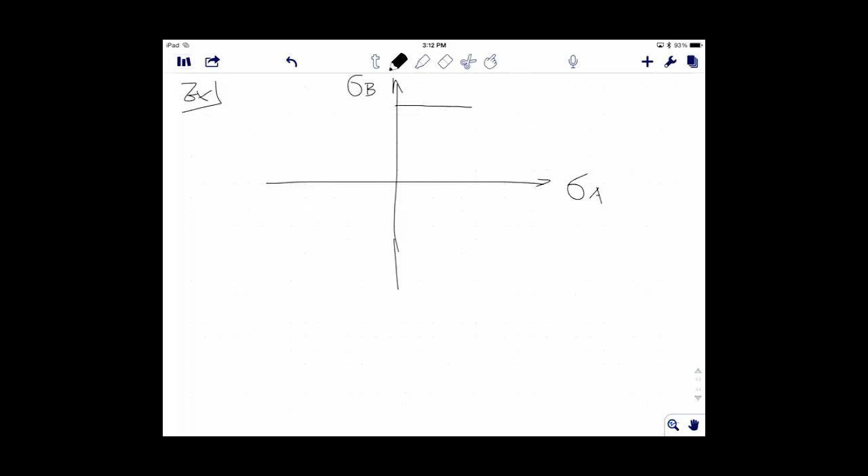Examples, finally. First of all, let me do a quick review of what we learned in the past week. Everything we learned can be summarized in this plot. You have two-dimensional loadings, then you have two different failure criteria to assess the failure of the material of the system: maximum shear stress and distortion energy.

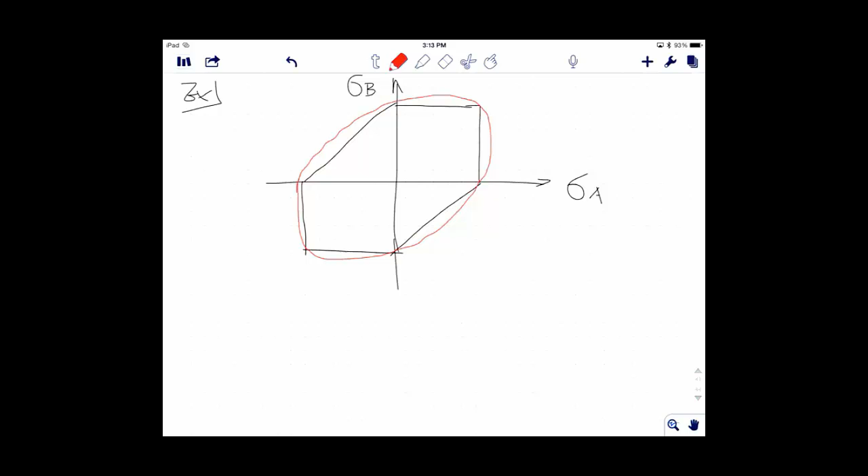Okay, so the red is distortion energy, and the maximum shear stress is the stuff inside, black. Now, the key point here is maximum shear stress is a little conservative, and distortion energy is a little aggressive compared to maximum shear stress. So we'll see how we can quantify that aggressiveness and conservativeness.

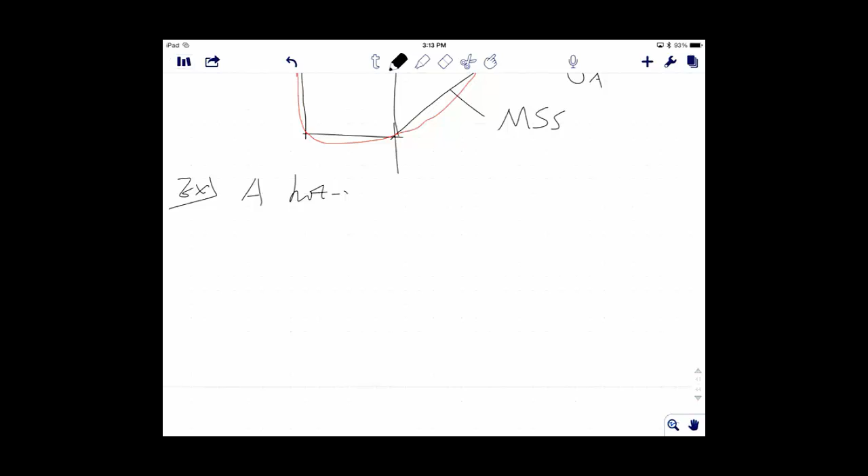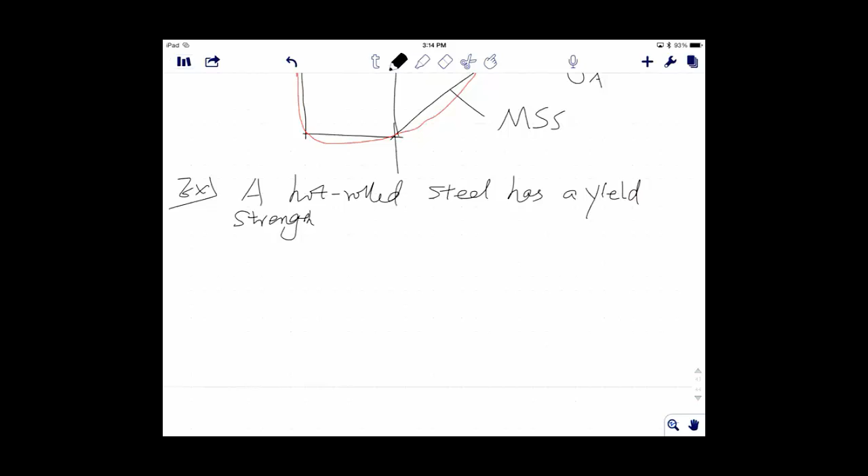So in this example, we have a hot rolled steel that has a yield strength of SYT equals SYC equals 100 kilopascal, and ultimate failure strength epsilon F is equal to 0.55. A really high failure strength.

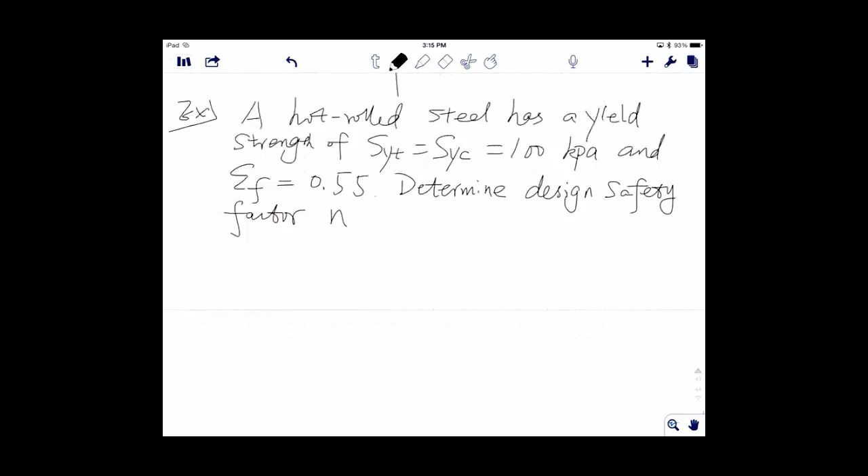It's asked us to determine design safety factors for the following stress states.

A: you have a stress in the x direction that's 70 kilopascal, and stress in the y direction that's also 70 kilopascal, and the shear stress equal to 0, so there's no shear, it's pure tension in both directions. All right, isotropic. So question B.

This time your stress in x is 60 kilopascal. In the y direction it becomes 40 kilopascal. And this time you have a shear, which is negative, 15 kilopascal.

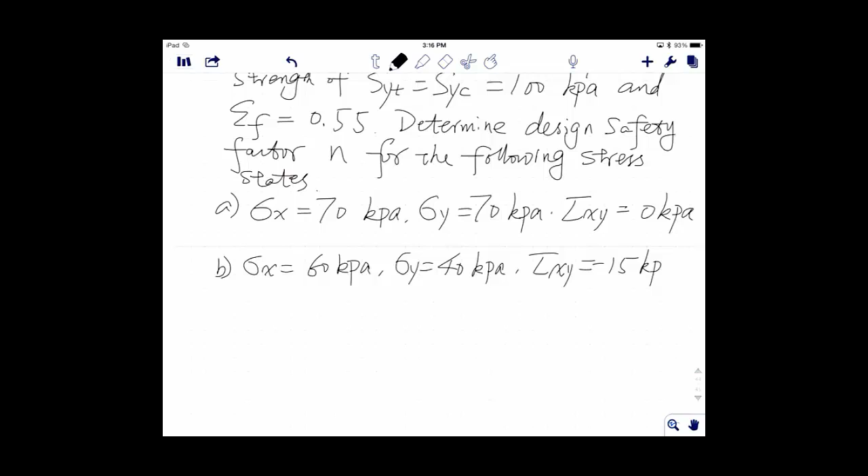All right, C. We have a 0. My handwriting is really bad, you guys in the back can see it? Good? Okay.

Tau xy equal to 45 kilopascal.

In case D, we have negative stress in x, minus 40 kilopascal. Sigma y is also negative. So this time we have compression and compression in both directions.

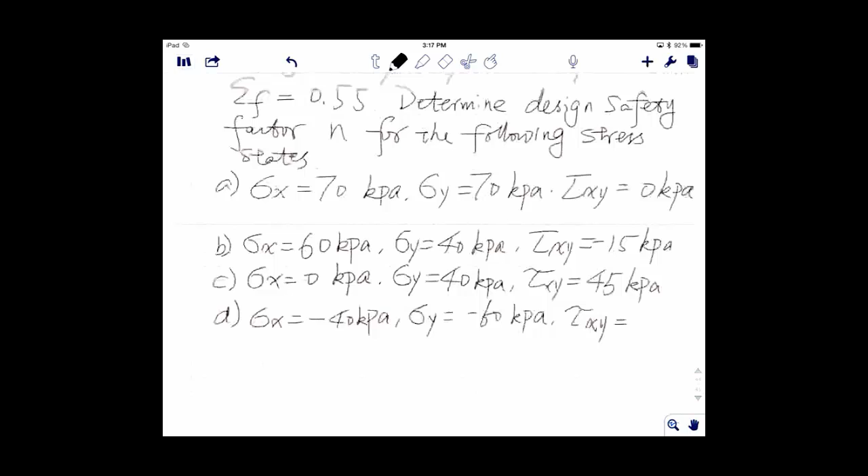Oh, the way I write 6 is not good, right? That is what you guys are complaining about. Better? 4 is good, 0 is good, right? 7 is good too, right? Great.

Right. Which one is not clear, Diego? Huh? Someone else. What was the question? Which one is not clear? What are you guys discussing?

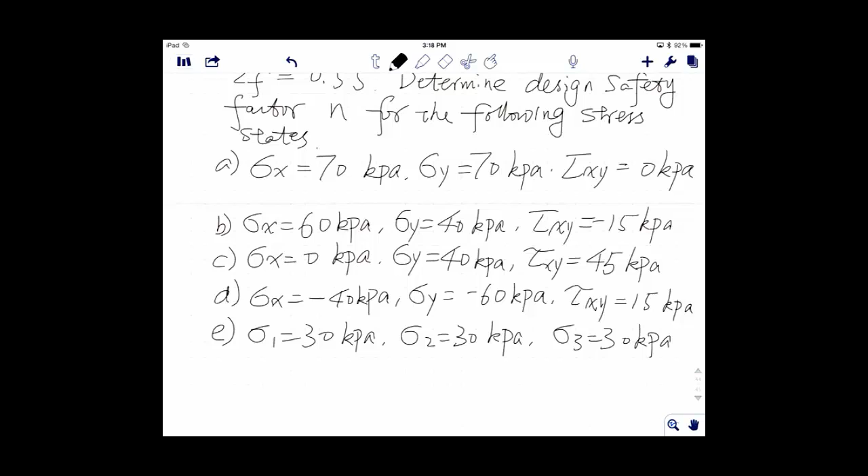Oh, I was asking about the problem, the EF of 0.55. What is that? Epsilon F, epsilon F. What is that? Failure strain. Strain? Yes, okay, strain at failure. Maximum strain it can take before failure. Okay. Strain.

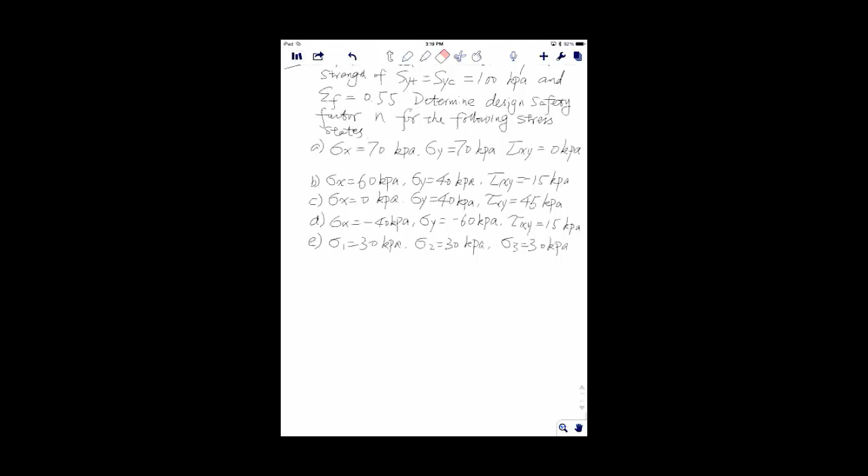Okay, so before we start, do you guys like this way better so you can see more stuff? Yeah. Yes? Alright, I'll do the way I like, since I heard a yes and a no.

Alright, okay, so first of all, let's see. Like Diego asked, so I'm going to explain that. Epsilon F is failure strain. So when you have a material, you load it up, this is what typically happens: stress-strain relationship, right? You have a linear stage, then a non-linear stage happening after yield, and then you have maximum stress, and then failure happens, broken into 2 pieces, right? The strain at failure is called epsilon F. F stands for failure.

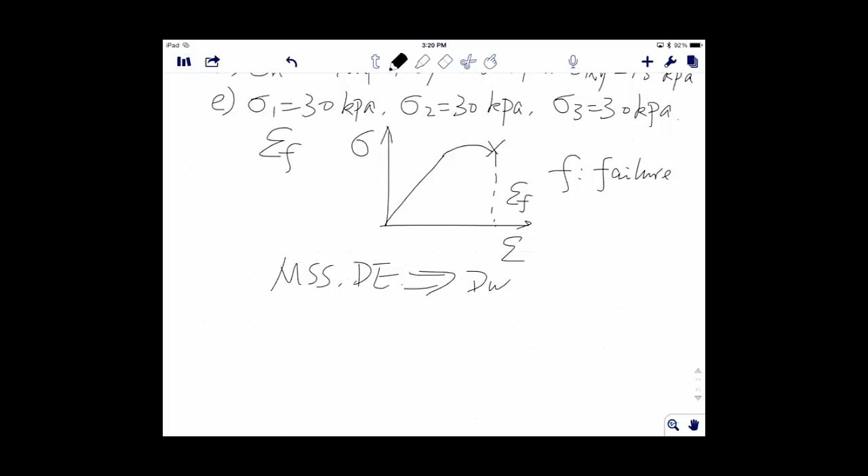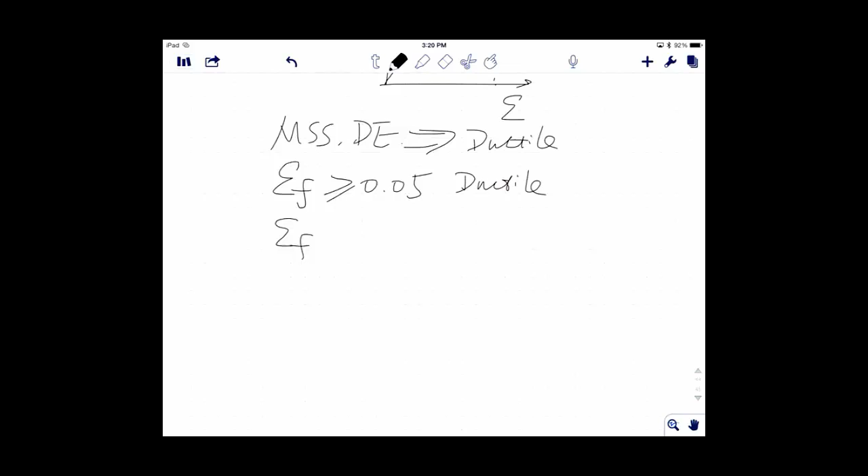Okay, all right, now why is that important? Remember, all these criteria we learned so far, they're for one material type: ductile, right? They are only good for ductile. If it's brittle, like glass or ceramic, it doesn't work, right? Okay, so the way we quantify ductile or brittle is by the ultimate failure strain. So the failure strain, if it's more than 5%, then it's ductile. Or if it's less than 5%, then it's brittle, right?

So all these MSS and DE criteria we learned can be used, okay? Because the ultimate failure strain we have equals 0.55, which is way higher than 5%. So yes, this checks out, right? This is kind of like we have to make sure those rules we learned can be applied to this material, right? So now checked, okay.

So we say MSS, the distortion energy.

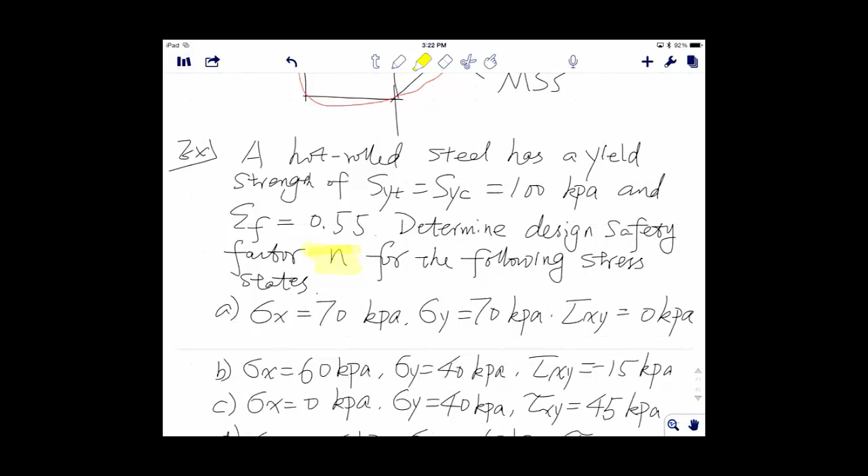All right, okay, so the question is asking, this problem is asking us to determine the design safety factor, right? So design safety factor, in other words, you're trying to look at the maximum stress it allows divided by the stress state you have, right? So we need to know these two quantities. First, what's the maximum stress allowed by using maximum shear stress or distortional energy. Second, where does the stress state lie, right? So that's something we want to clear off. All right, so keep in mind we are all looking at this. This is what we need to find.

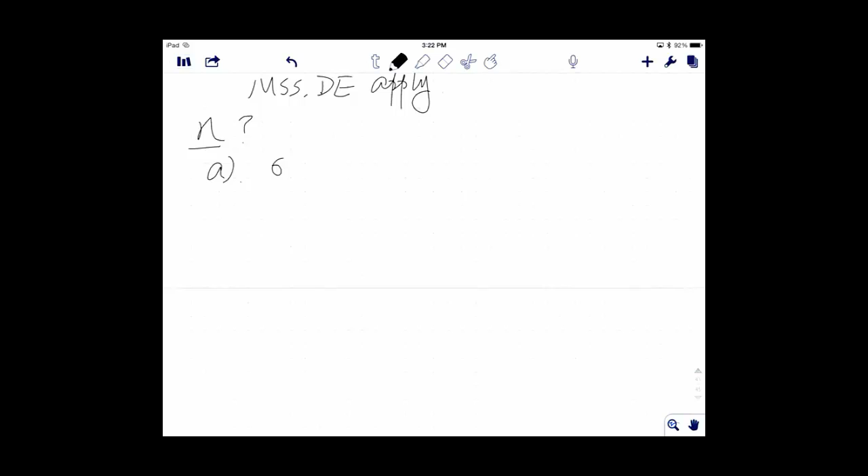Okay, so for case A, first of all, let me write it here. X is 70 kilopascal. Y is 70 kilopascal. XY is 0 kilopascal. Okay, so relatively speaking, very easy and simple stress state.

Let's look at distortional energy first, because relatively speaking, that's easy, right? All distortional energy uses the von Mises stress. Von Mises stress equals square root of sigma A squared minus sigma A sigma B plus sigma B squared. All it does is compare this, right? And once your von Mises stress is above yield strength, then failure is going to happen. That's what we decided, right?

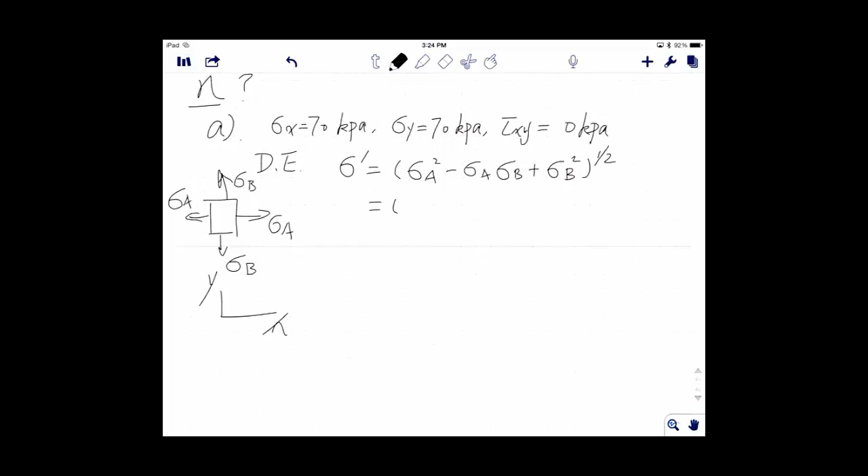Okay, so we plug it in. Sigma A and B, in other words, they are X and Y, right? So just stay here, A, B, right? So in other words, if you set up a coordinate system like this, X and Y, they're the same, right? So sigma A and sigma X are the same. Sigma B and sigma Y are the same. Okay, so plug it in.

Okay, these cancel out. Square root and a square cancel out. So this is my answer for von Mises stress using distortional energy.

Now again, I am looking for this, how it's determined. Design safety factor equals yield strength divided by my stress state according to the definition. Using distortion energy, that's what you need to use. So SY in this case, it's given here.

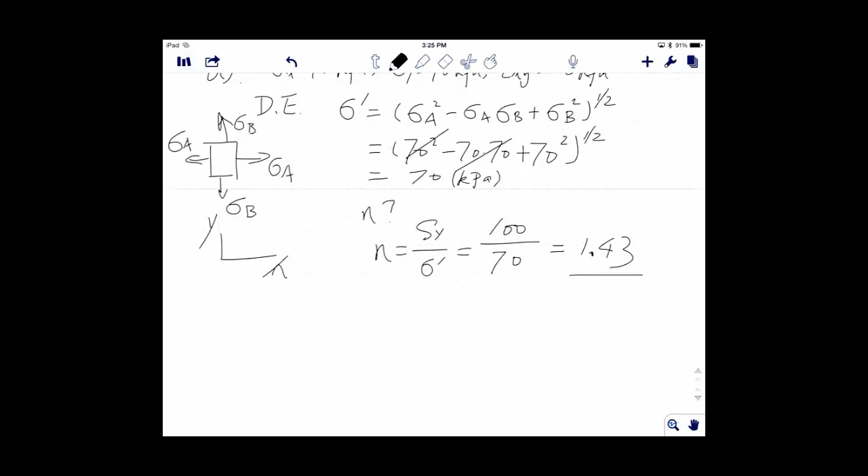Let's see, it's equal to 100 kilopascal. 100 kilopascal divided by 70 kilopascal, the answer is 1.43. So design safety factor is 1.43, that is my answer. Any questions so far? Alright, okay so next.

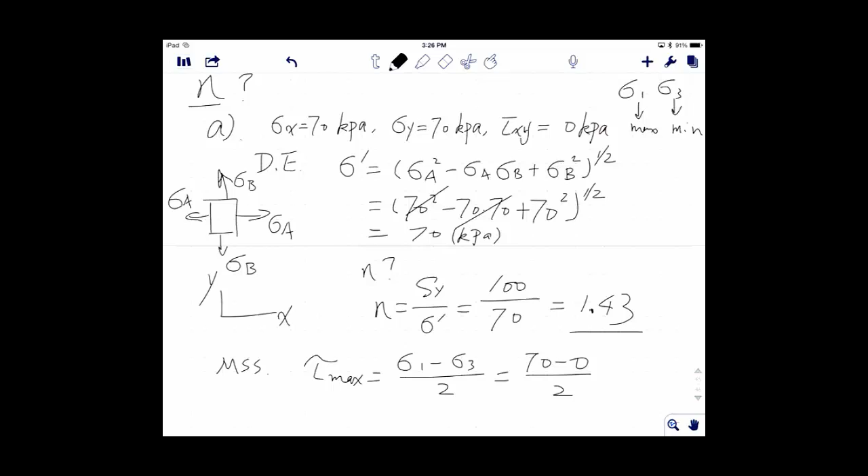Using maximum shear stress. Maximum shear stress is just trying to find the maximum shear stress existing, right? So tau max equals sigma 1 minus sigma 3 divided by 2. That is equal to 70 minus 0 divided by 2, because you have 70, 70, and a 0, right? Remember, this is a 2D case in this loading, so we still have sigma 1, sigma 3. 1 is your maximum stress, 3 is your minimum stress. Don't forget 0, because if it's a 2D case, that's telling you the third direction stress is 0. So 70 minus 0 divided by 2, that is 35 kilopascal.

Also, we want to find this design safety factor, the safety factor when you use maximum shear stress. It has a parameter of 2 in the denominator, don't forget that. Two times 35 equals 100 divided by 70, which is also 1.43. This is my answer using maximum shear stress.

So this is what we did, and like you see, you have two different criteria to determine the failure, and we know design safety factor is just a measure of the failure stress over the stress state you have. When you use maximum shear stress, you are considering the shear stress, while for the distortion energy, you are considering the von Mises stress, which is the same one as what you output from your finite element analysis.

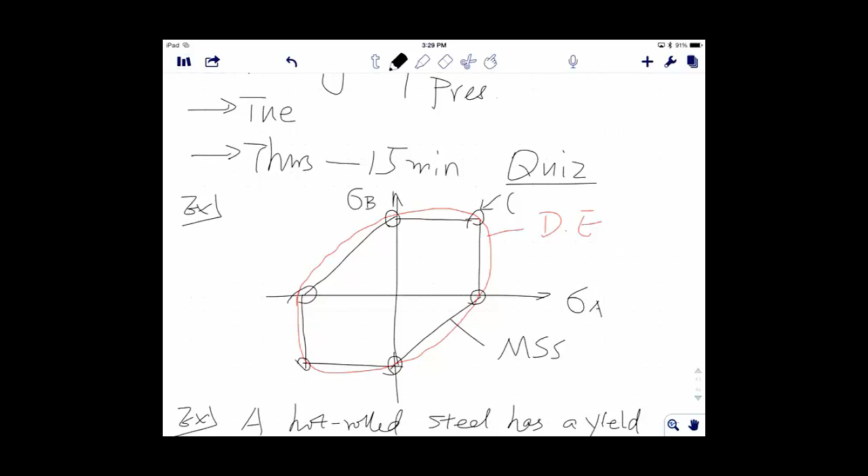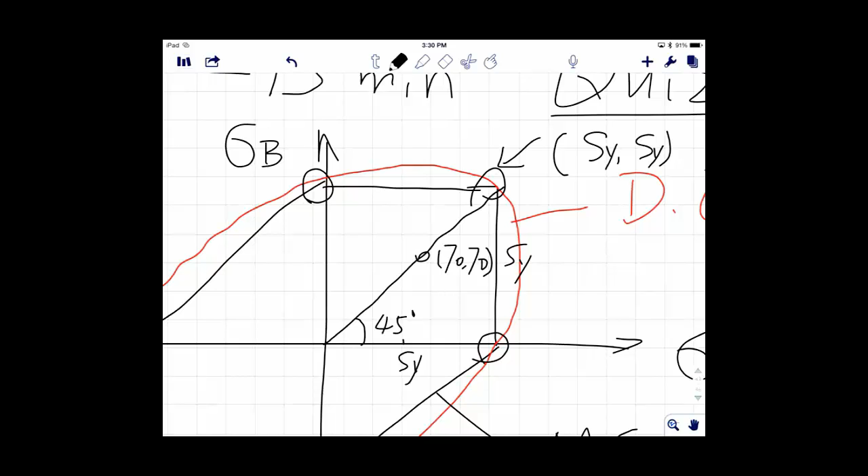Remember, on this plot, we have 6 points, all the same. So there's a special point over here, right here. What's special about it? The DE and MSS are the same, right? Yes, exactly. The coordinates of this point are: in the x-axis it's sy, in the y-axis it's sy. So if you draw a line to connect them, your stress state for question A is on this line, because this line has angle 45, since this is sy and this is sy. So what you have just now is 70 and 70, right on this line.

That's something I was going to say after all the A, B, C, D, E, but I'm glad you brought it up. So just so you know, if your stress state has the same X and Y, the design safety factor will be the same. And the only thing is, don't forget this parameter. Once you use shear stress, that's how we derived it before - don't forget the denominator has a 2.

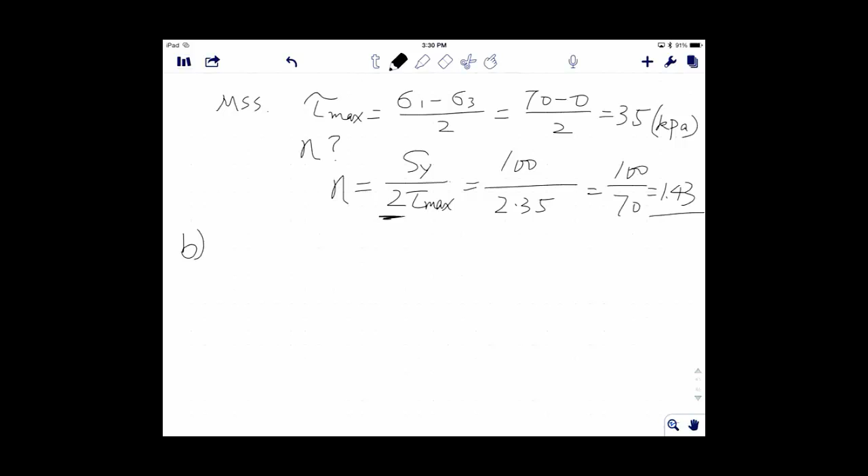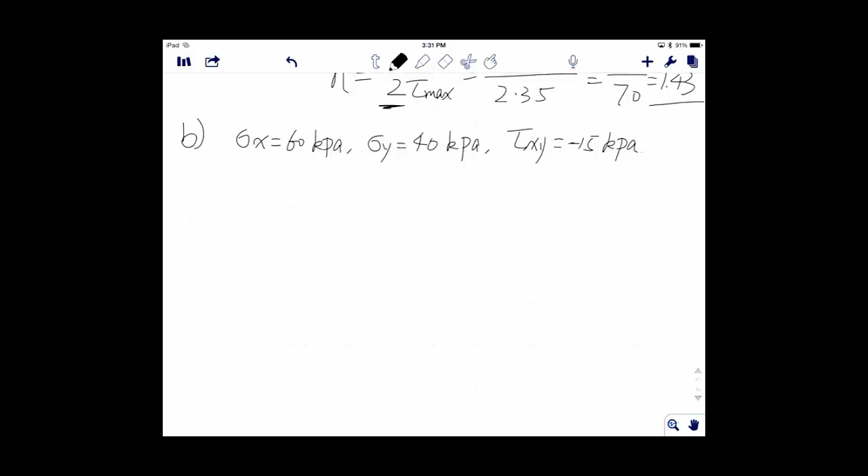Alright, for question B. Question B is a little interesting. Why? You have X equal to 60 kilopascal, Y equal to 40 kilopascal, and you also have shear stress equal to negative 15 kilopascal. So you not only have tensile, you also have a shear stress. In other words, in this case, you have all of these. Now this is a little confusing, why?

Remember maximum shear stress? What we compared is sigma 1, 2, and 3. We didn't really consider this. So when you have a shear stress in your loading conditions, then the maximum shear stress, you cannot directly use it, because maximum shear stress is based on normal stress. I'm sure you learned this before in mechanics of materials - you can do coordinate transformation to get something called principal stress.

How many of you remember you learned principal stress? Okay, alright, sure. It's just a coordinate transformation technique, right?

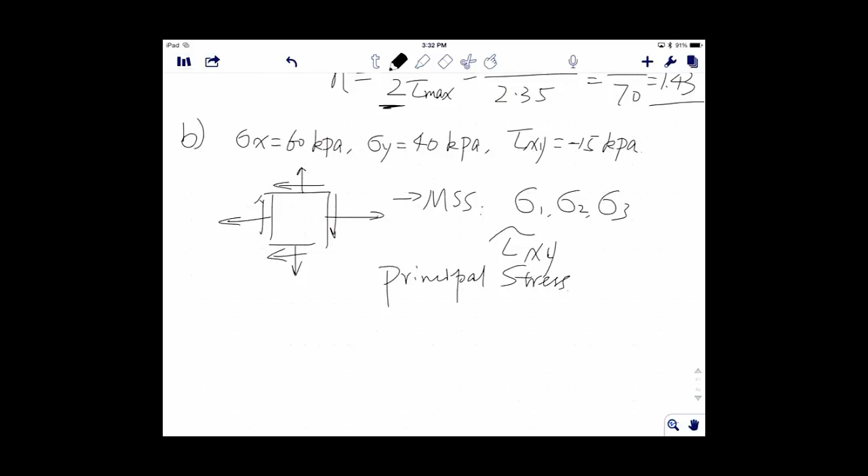So the equation goes like this. If you have stress in both normal and transverse, then the principal stress equals x plus y divided by 2, plus or minus the square root of x minus y divided by 2, squared, plus tau xy squared.

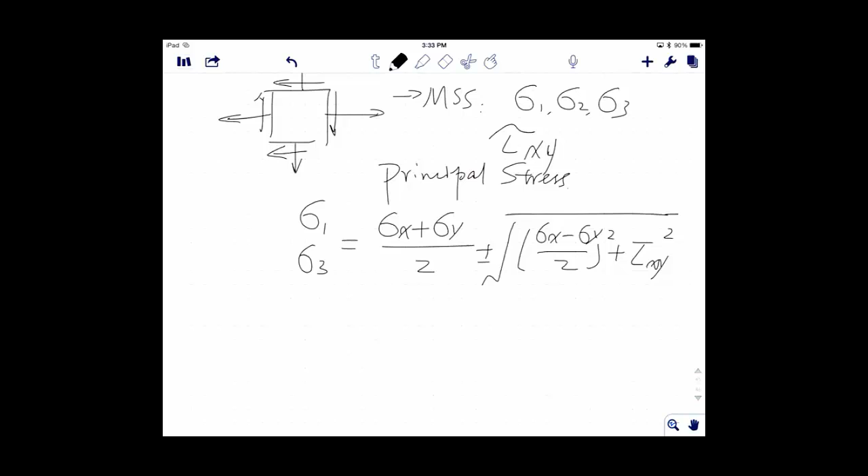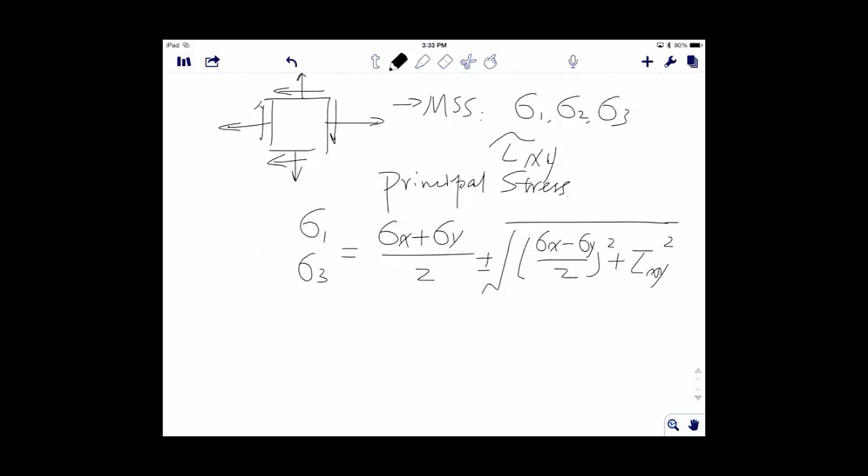Whatever on the right hand side of this equation is the stress state I gave you, right? So we have stress in the x and y direction, and also shear stress. Whatever is on the left hand side is my principal stress, which is what my maximum shear stress analysis is based on. So in other words, principal stress, all it's doing is...

You have these stress components, right? We do something called coordinate transformation. Then you transfer the stress to a case where no shear stress exists. Why? Because this stress can be divided into two components, x and y.

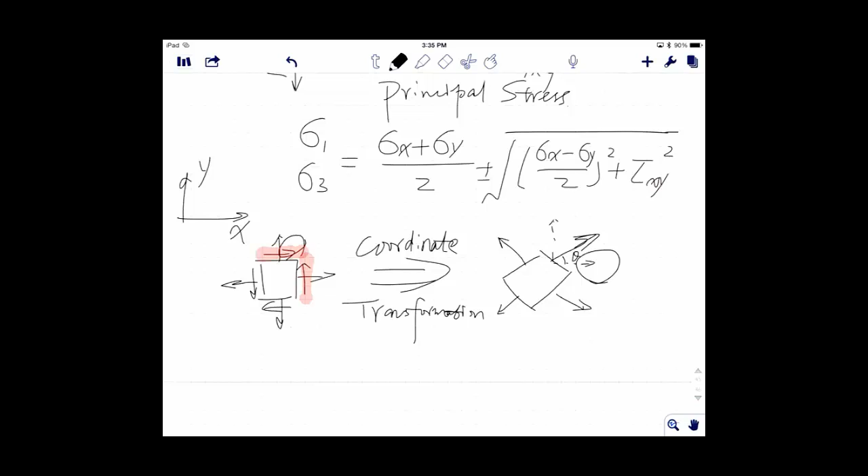At the same time, shear stress is nothing but stress applied on the x direction. This stress and this stress acting on the x and y directions are one pair of stress, and they're called shear. So when you rotate that normal stress to a certain angle, theta, this normal stress can be decomposed into x and y, and this x component is holding the same deformation as the shear stress.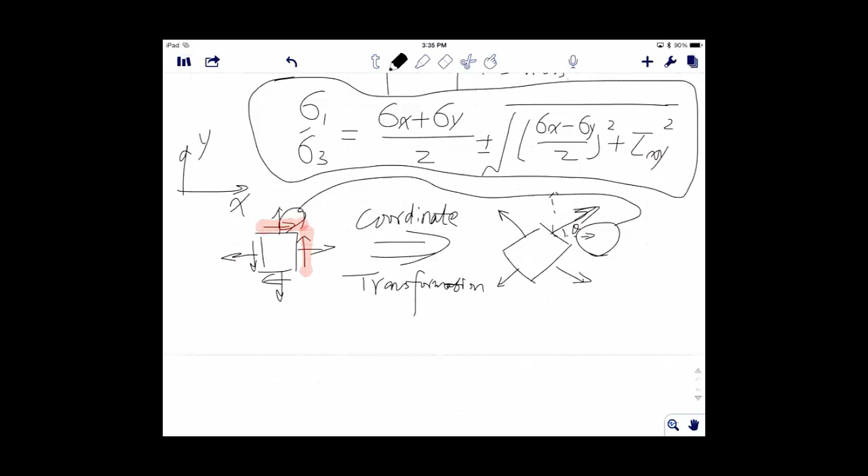Okay, alright, so I'm not going to spend time on the principles. If you still remember Mohr's circle, you know what principal stress is. Anyway, in this class we're just going to focus on how you calculate those principal stresses. This is the equation you need to remember.

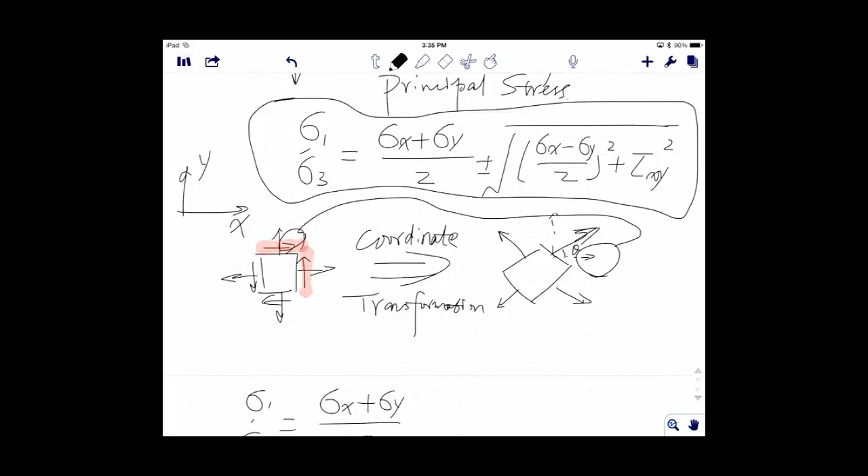So for case B, what's the question? Is there a division sign between the left side of the equation? Or is it just saying sigma 1? Sigma 1 is your maximum, sigma 3 is your minimum, right?

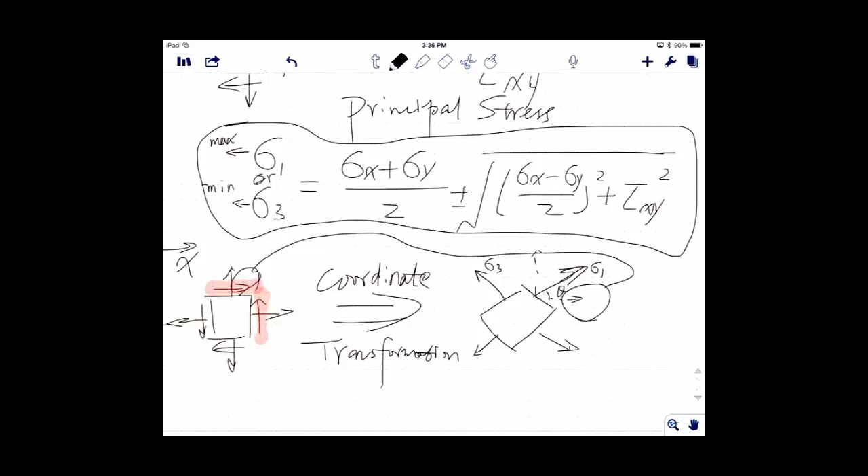Because principal stress in 2D is mainly on two axes, one here and the other here, 90 degrees apart. The maximum is when the plus is happening, the minimum is when the negative is happening. So here you have positive and negative, right? Okay, any other questions?

So okay, this is the equation I need to use later on. Alright, I'll keep that in mind. What you can do is plug in the numbers. Let's see, what's the number here? 60, 40, and minus 15.

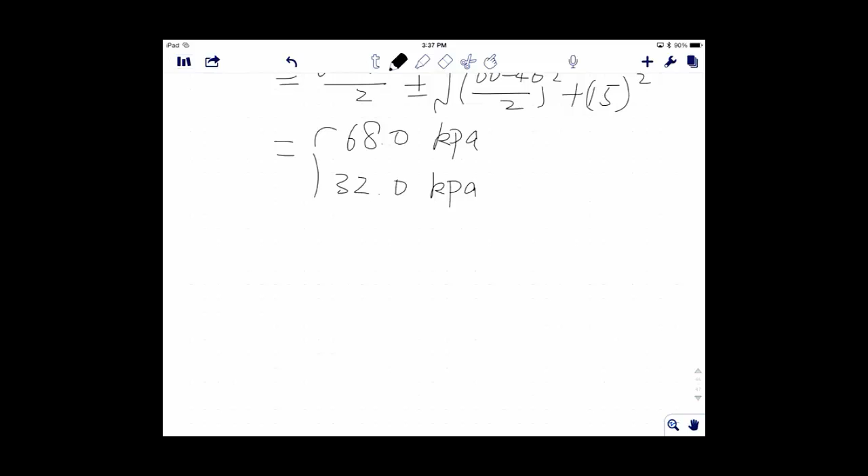60 plus 40 divided by 2, plus or minus the square root of 60, 40, plus 15. Do the calculation, you'll have two stresses. First one is equal to 68 kilopascal, and second one is 32 kilopascal. So that's my guideline for both distortion energy and the maximum shear stress.

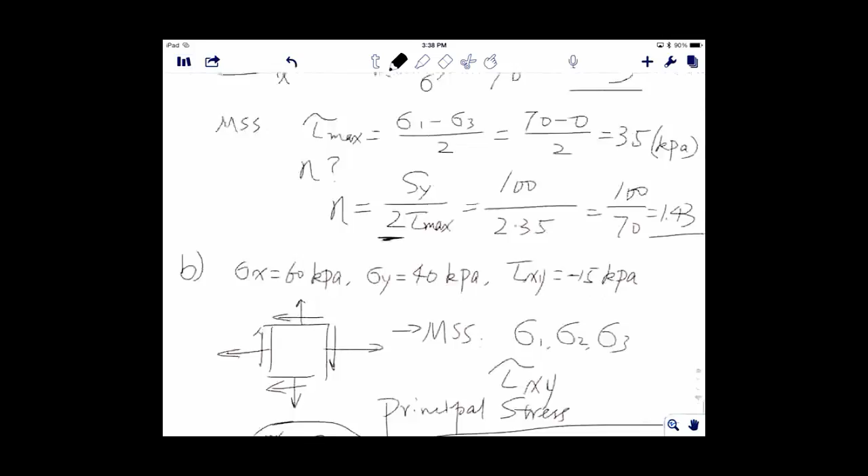Once we know the principal stress, distortion energy again is looking at the von Mises stress. Here's negative 15, right? So you have a square, doesn't matter whether it's positive or negative. Either way, you can write positive or negative, they understand.

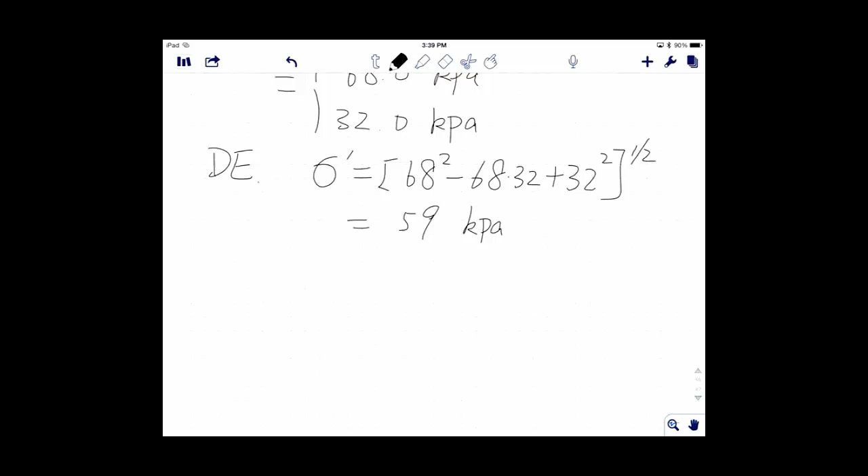Alright, so for distortional energy, let's plug in those principal stresses. So this von Mises stress is 59 kilopascal. Again, we're looking for design safety factor equal to SY divided by this, and therefore we have 100 divided by 59, that is 1.7.

Oh actually, I'm going to show you another way of doing it. Remember, at the end of Tuesday's class we also introduced von Mises stress calculation, where you have a shear stress which equals this, right? Or you have a shear stress component. This is what you can use.

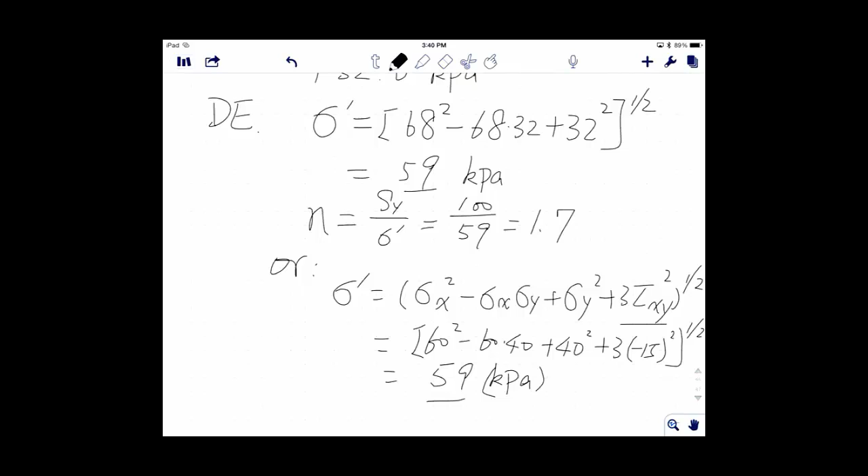Now you can do the same thing, plug in those numbers directly from the given condition. It's going to give you the same von Mises stress as we expected. These two are the same.

So in other words, what I'm trying to say is, when you have both normal stress and shear stress, and you try to calculate the von Mises stress using distortion energy, you can do it two ways. First, try to find the principal stress like I did here, and then plug it in since there's no shear component. Or you can just use this definition, with the shear stress plugged in directly. It's going to give you the same von Mises stress, whichever way you want to do it.

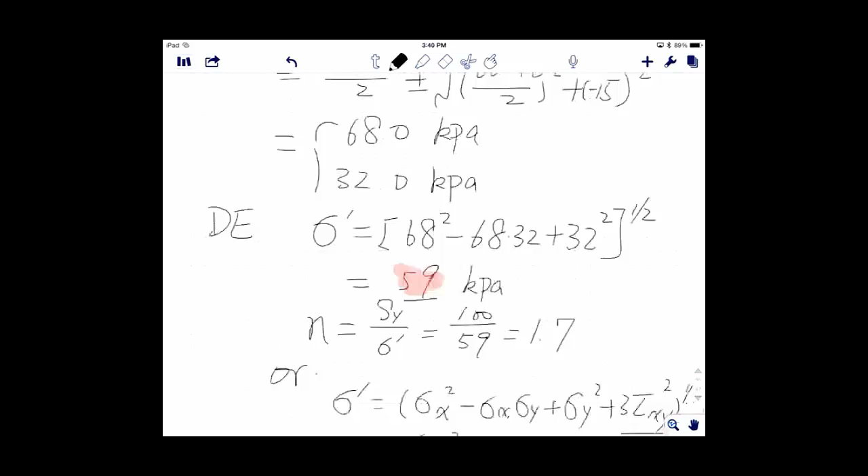Alright, I'll tell you which way I like to do. I like to do the principal stress. It's because I just like it the harder way, right?

The reason I like it is because when you use maximum shear stress, you need to calculate it anyway. For maximum shear stress, we have to calculate the principal stress, so even if you did this, you still have to find the principal stress for the maximum shear stress component. So it's not going to give you any shortcut.

For maximum shear stress, we have tau max equal to sigma 1 minus sigma 3 divided by 2, equal to 68 minus 0 divided by 2, that is 34 kilopascal.

This n over here is SY divided by 2 times tau max. SY is still 100, 2 times 34 is 68. So 100 divided by 68 is 1.47.

So here you compare these two numbers. Diego, what do you think? It don't look like they're the same. They don't look the same. So what? Yeah, it's not the same. And is that what you expected?

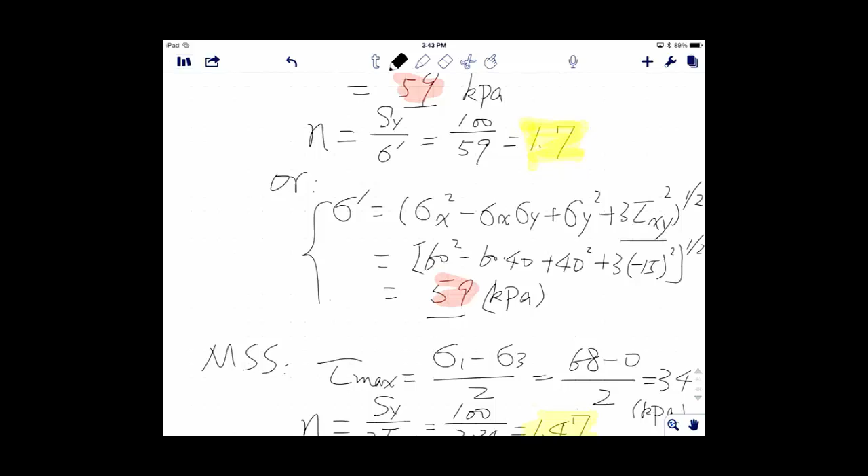Is it sigma 1 minus sigma 2? Which one? How much, this one? What about it, is it sigma 1 minus sigma 2? Because you put sigma 68 minus 0... sigma 3. Oh, okay.

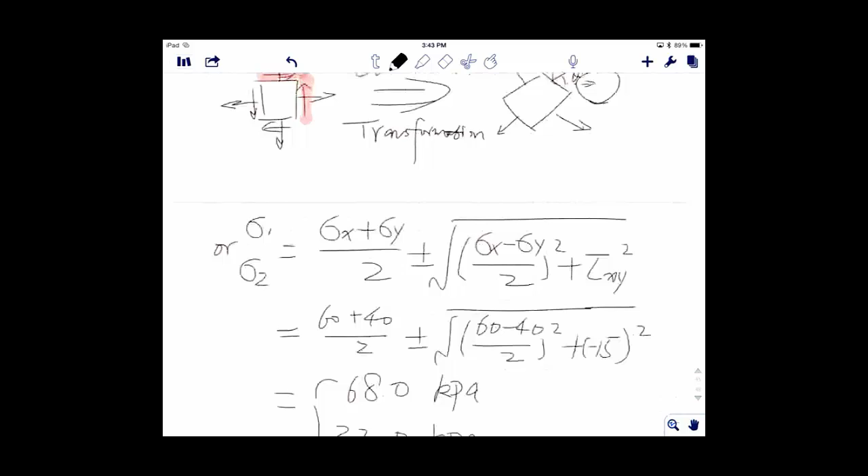Thank you for bringing that up. Then actually this one is sigma 2 - sorry, I apologize for that. Because sigma 1 and sigma 3 are the maximum and minimum, and you have 68, 32, and 0, which correspond to these three numbers. So therefore sigma 1 minus sigma 3 should be equal to 68 minus 0. Thank you for bringing that up, I apologize for the confusion.

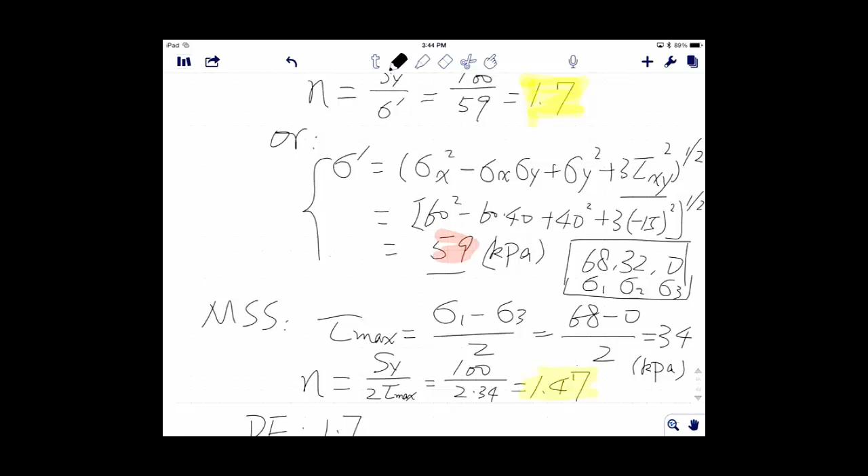So this number is smaller, therefore it makes sense because it's more conservative, okay. So question C.

Question C, let's see what's the first state. Sigma x is 0, sigma y is 40 kilopascal, and tau xy is 45 kilopascal.

Over here, there are again two ways of doing it. You have both normal stress and shear stress. You can calculate the principal stress, do the same thing as in question B, or you can do it the other way, like I mentioned - just calculate the von Mises stress by definition.

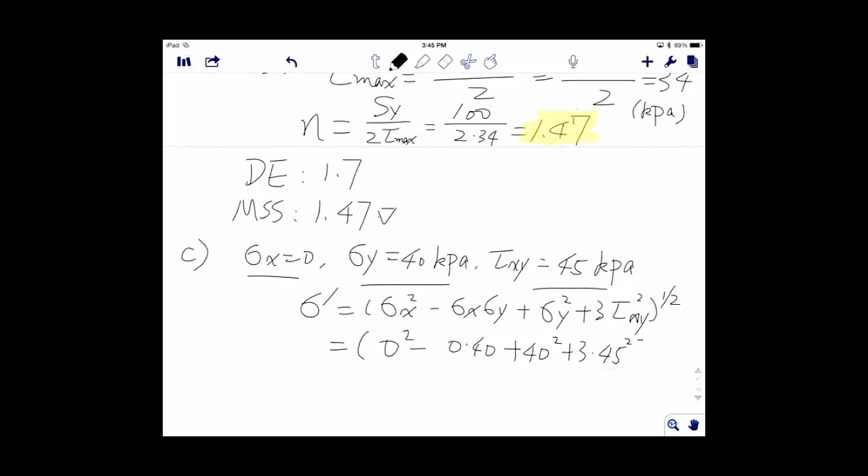Plugging in all the numbers: 0 times 40 plus 40 squared plus 3 times 45 squared, and square root - that gives you roughly 87.6 kilopascal for the von Mises stress.

And this n equals SY divided by sigma prime, which is equal to 100 divided by 87.6, which is equal to roughly 1.14.

Okay, so for maximum shear stress, let's look at something interesting here. These equal sigma x plus sigma y divided by 2, plus or minus the square root of sigma x minus sigma y divided by 2 squared, plus tau xy squared.

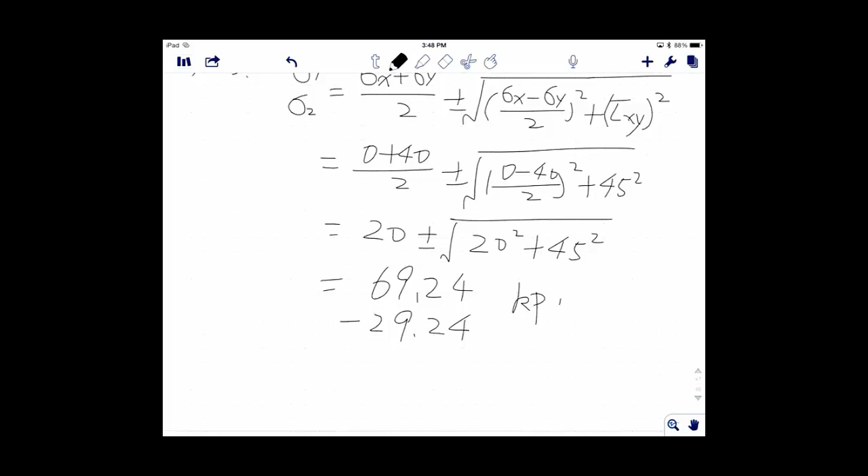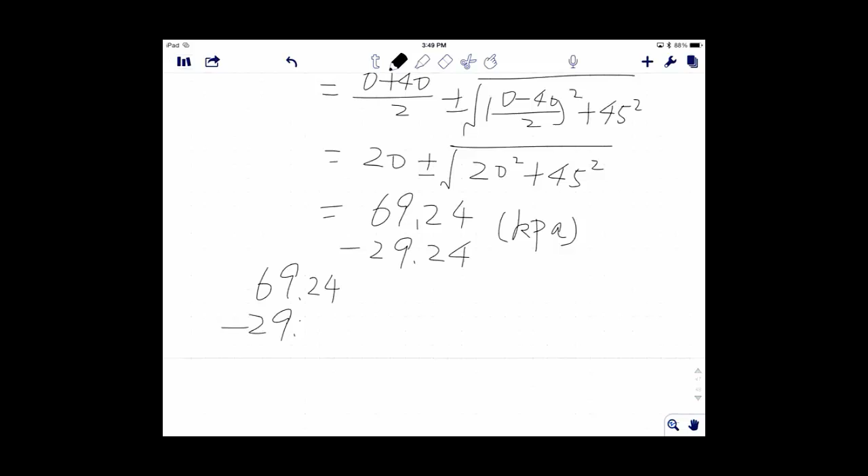In this case, sigma 1 has to be 69.24 because we consider it the max. Exactly - the principal stresses, these are just two symbols to represent the values. For maximum shear stress, all it cares about is maximal minus minimal. So in this case, you have principal stress of 69.24 minus 29.24. You also have 0, right? Of course, this is my sigma 1, this is my sigma 3. Make sense?

So tau max equals 69.24 minus 29.24, divided by 2. Let's see what the number is - I think it's supposed to be 49.24, if I'm right. Did I calculate right, Brian?

Looks about right, let's see - yes, alright. Okay, so we have that, then the safety factor equals SY divided by 2 tau max. So 100 divided by 2 times 49.24 - wow, it's really close, huh? It's supposed to be equal to 1.02. Alright, right on the edge of failure.

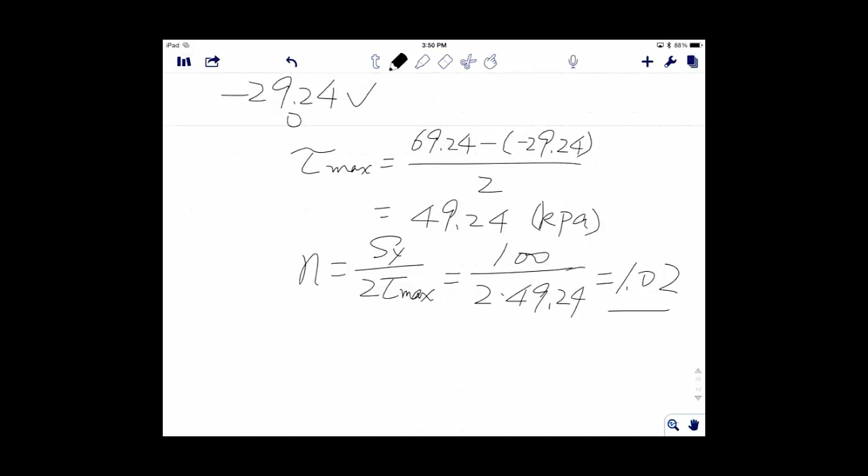Okay, so this time let's see these two numbers, 1.14 and 1.02. Again, this number makes sense because maximum shear stress is more conservative, so it's supposed to give you a smaller number, right? Okay, so any questions so far? No?

Okay, so D - again it has compression and a shear stress. What's the question?

So you have negative 40, you have negative 60. In this case, why isn't 0 your maximum? 0 is my maximum, but I still need to calculate the principal stress. Yeah, good question. Actually 0 is my maximum, but I still want to know the minimum.

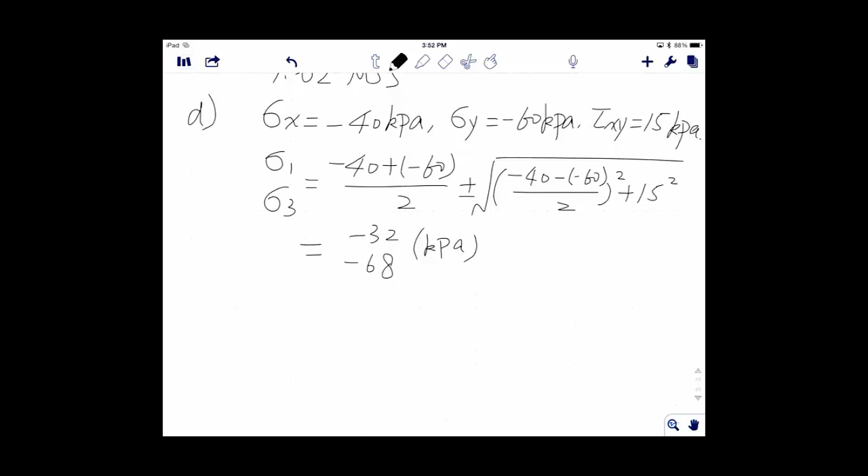Minus 60 divided by 2, squared, plus 15 squared. Alright, so I have 2 sets of numbers. Actually I think I should write this way. The tau maximum shear stress is supposed to be that, right? Then we'll get rid of all the confusion. Alright, maximum minus minimum. Maximum is 0, minimum is negative 68. Divide by 2, that's going to give me 34.

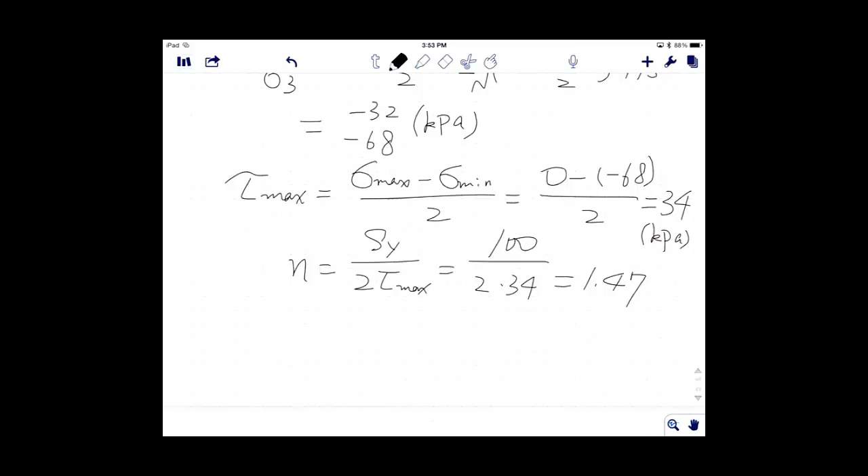Okay, alright. Then the design safety factor equals 100 divided by 2 times 34, which is 68. It's also 1.47, which is similar to the answer we got before, huh? Distortional energy - you do the same thing.

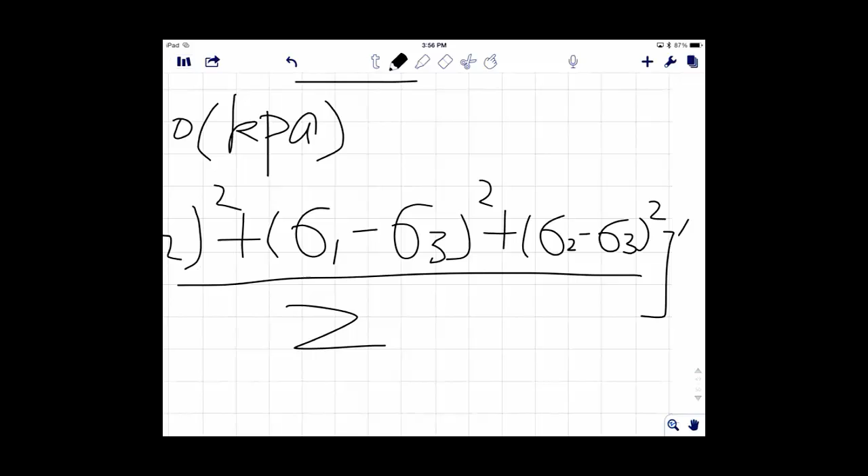Right, equal to that. So if 1, 2, and 3 are the same, then that's a hydrostatic loading, right? So this Von-Mises stress equals what? 0, right? So that tells you there's no distortion happening here. And we know for distortional energy, it says it's the distortion that causes failure. So therefore, once you have a 0 in the denominator, then you get infinity, right? Okay, we'll discuss this infinity later in a minute.

For maximum shear stress, this tau max equals maximum minus minimum divided by 2. Okay, so if you have that, that is also 0. And by definition of safety factor, it is also infinity, right? So does it really make sense? Infinity? There's no way you can design something with an infinity design safety factor, right? So what does this case E tell us?

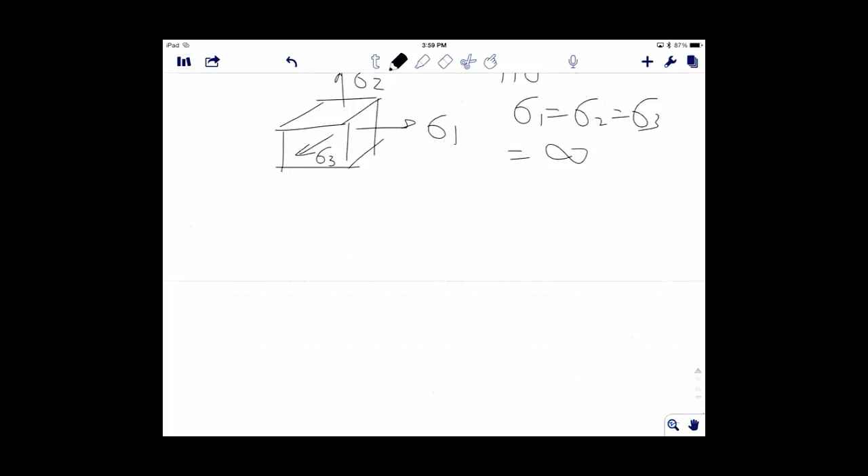They do not apply here, right? Because it's against the fundamental assumption of this failure criteria, right? There's no distortional energy, so therefore you don't have distortional deformation, and there's also no minimum and maximum - they're all the same, so therefore you don't have shear stress inside of it, so failure doesn't happen. But theoretically speaking, is it true you have infinity? No, right? Imagine this: if you have a cube made out of whatever material, for example, made out of plastic. If the 1, 2, and 3 stresses equal infinitely large, of course it's going to cause failure, right? So once we have hydrostatic loading, that tells you the maximum shear stress and distortional energy, MSS and DE, they don't apply, right? So infinity doesn't mean, from a physical point of view, it has infinitely large design safety factors, right? Okay, so we're done with this example.

Took us 1 hour, huh? All right. So we'll be seeing questions like this in exam 2. 5 over there. All right, good. We're doing it. Don't hate me, hate him.

All right. So for A, B, C, D, and E, we have... I'm trying to summarize all the design safety factors here, and we can totally draw a conclusion. Is that distortional energy is equal to or bigger than maximum shear stress, as we expected, because this is more aggressive, this is more conservative, right? Okay. All right. So let's take one step further.

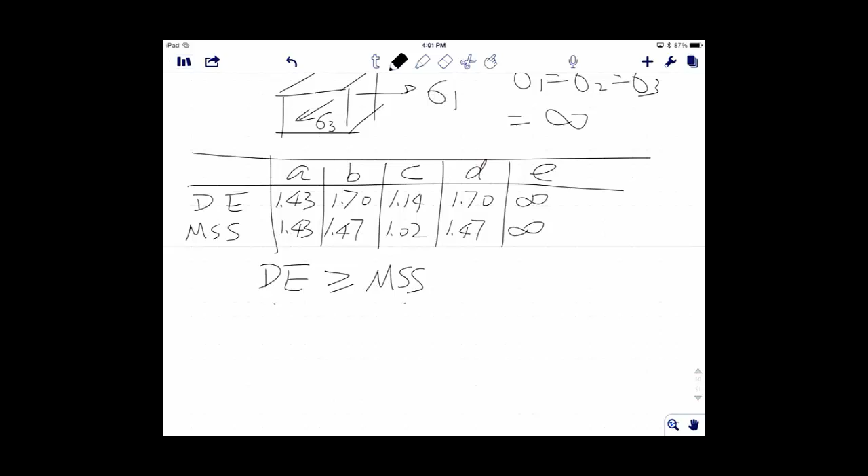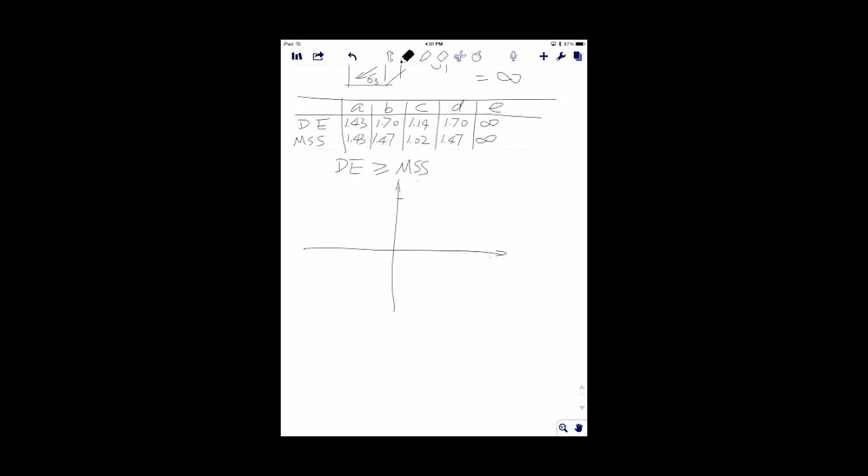All right, there you go. Now make both of us happy, right? I can write on the bottom, you can look at the front and the top. Okay, so...

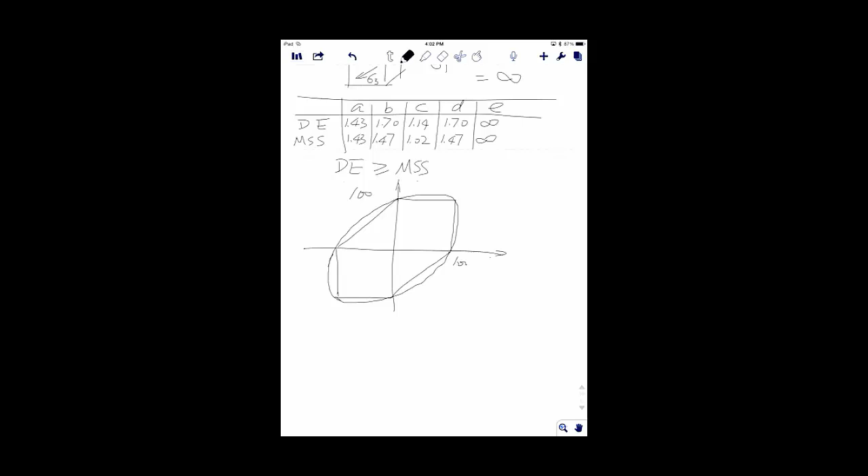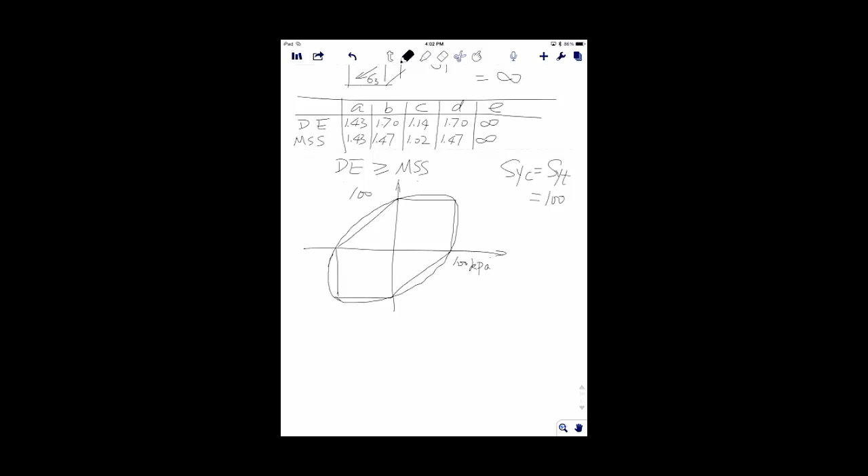This is our baseline. This is what we learned, right? Maximum shear stress in the center, distortion energy on the outside. Okay, now for this specific case, we know at this point they're all 100 kilopascals because SYC and SYT are the same, right? So they're all 100. So 100 kilopascal on the Y, 100 kilopascal on the X. And over here, you have negative 100. I'm looking at these 4 points, right? Kilopascal, negative 100 kilopascal.

All right. Basically, I took something generic to something specific, right? Okay, so what I'm going to do next is try to see those design safety factors, how we can describe them on this plot. For case A, it has a load of 70 and 70, right? Remember this? Case A, 70.

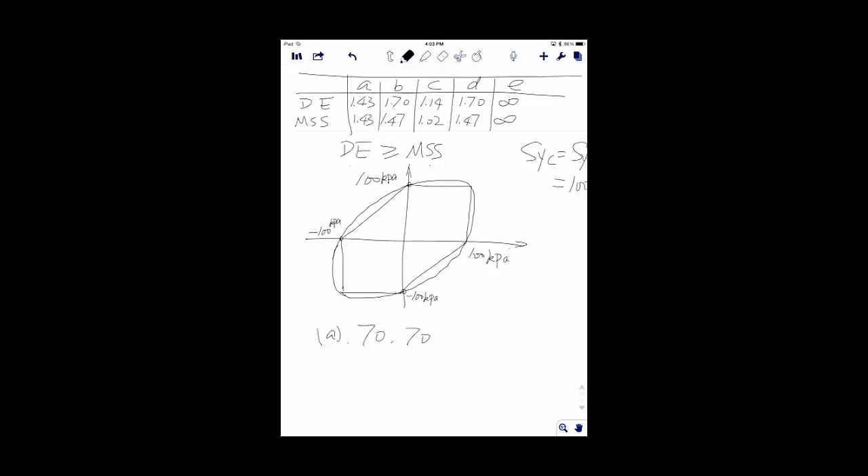Sigma X is 70 kilopascal, Sigma Y is 70 kilopascal, and there's no other loading, right? 70 to 70, so probably somewhere over here. Let's say this is 70 and 70. Alright, let's draw a line.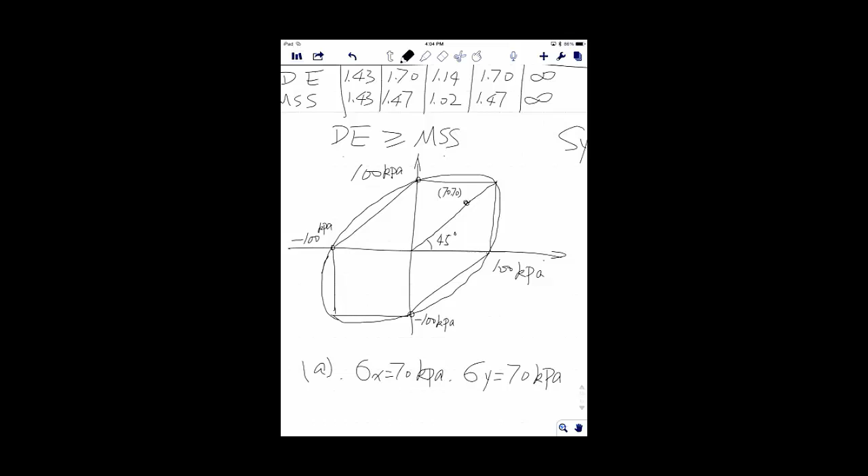Like we discussed, this case A is on the line of 45 degrees, right? Now, what I'm going to say is let me define 3 points: Point O, point A, and point A prime. A prime is exactly this point over here. So I say this design safety factor equals the length of OA prime divided by the length of OA. Do you believe me?

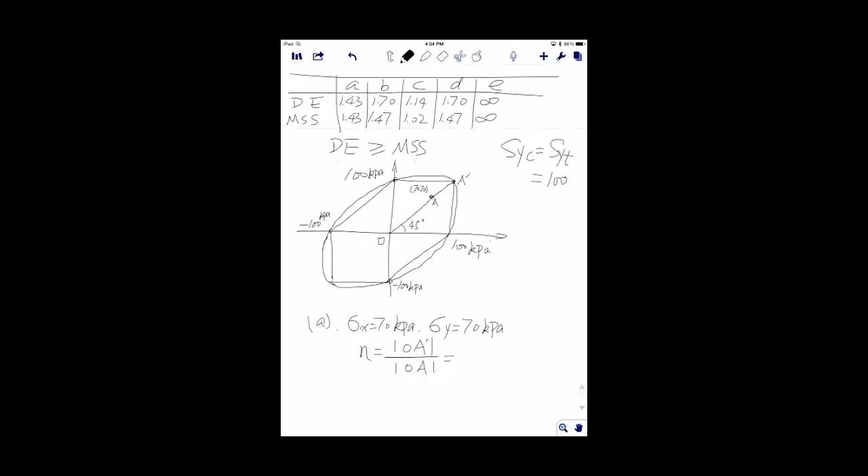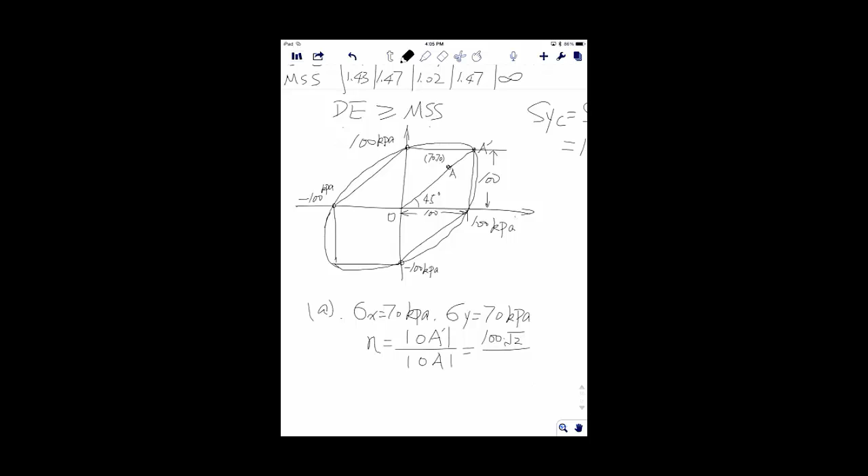Let's try it. OA prime, we know, should equal 100 times square root of 2, because it has 100 on the x-axis, 100 on the y-axis. Agree? Now, OA equal to what? 70 times square root of 2.

Okay, these two cancel out. What is 100 divided by 70? 1.43, right? Now, is this accident? It's not, right? Because design safety factor is a measure of maximum stress you can apply divided by the stress that you have. So now this might be a coincidence, right?

So let's look at other things. Let's see which one should I look at. Let's look at case B, for example. Now B has a stress state of 40 kilopascal, and also we have negative 15.

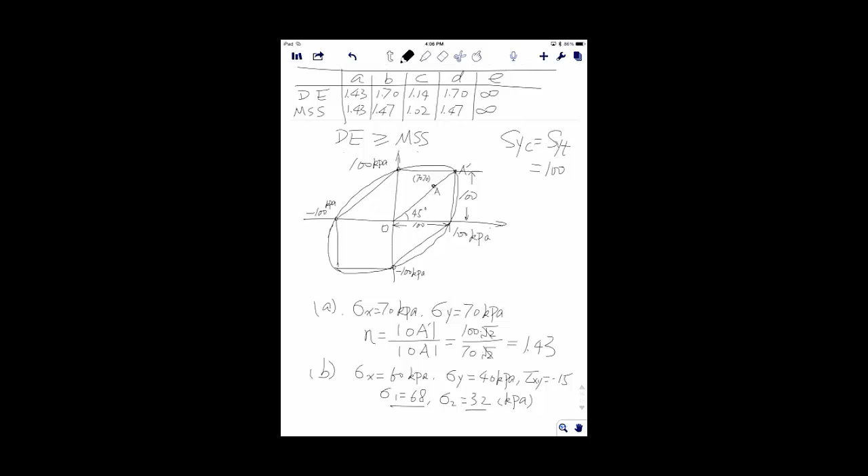And we did calculate the principal stress equals to 68 and 32. This is what we calculated, right? Alright, so 68 and 32 is supposed to be somewhere, let me use a different color this time. 68 and 32 is supposed to be somewhere over here, lower because the y-axis is only 32.

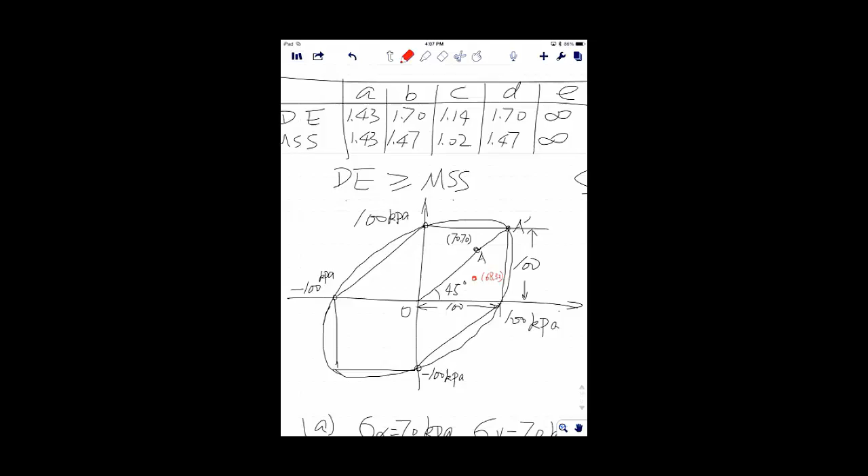Okay, so if I draw a line over here, I have a point here and here. So this is my point B. This is my point B prime. This is my point B double prime.

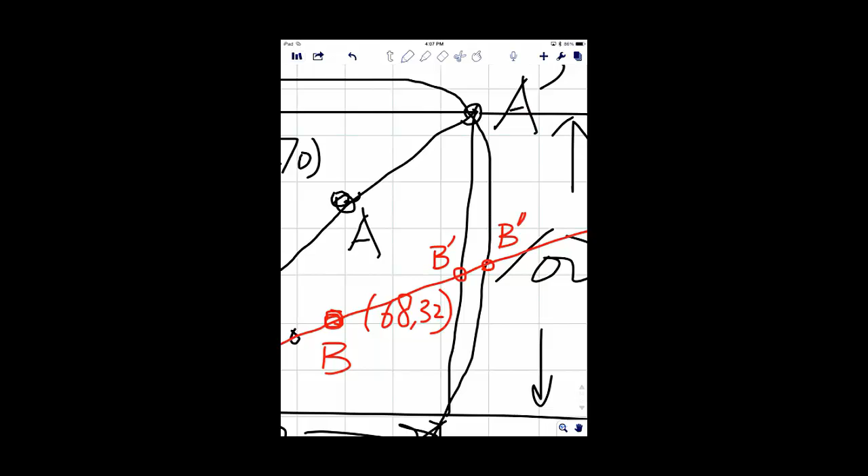Now, if you're interested in that, you can do this. This design safety factor caused by maximum shear stress equals OB prime divided by OB. The distortional energy N equals OB double prime divided by the length of OB.

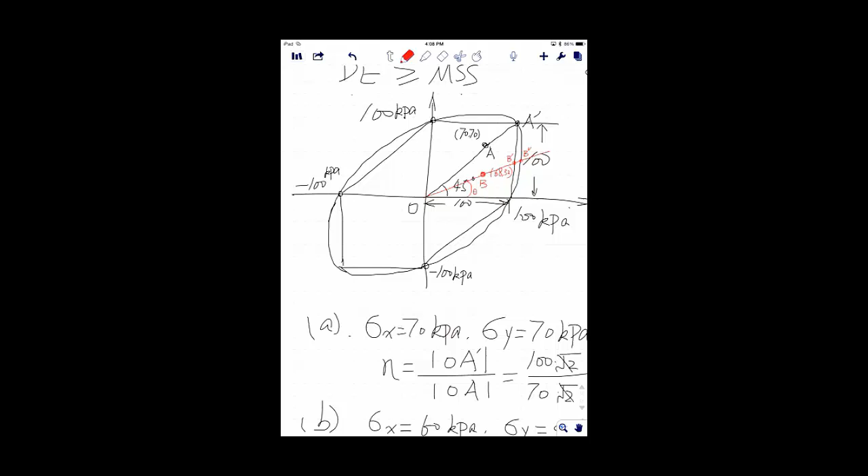Now it's a little complicated. If you want to do this, first of all, you need to determine the theta, so you have a slope. Then you can form the expression of this line, and then solve the equations so you can know the coordinates of B prime and B double prime. Plug it back in. So we're not going to do that, but something we can do is qualitative.

So tell me which line is longer, OB prime or OB double prime? Double prime is longer, right? Okay, so that tells you once you have the same denominator, and if the numerator is bigger, of course this number, let's say A, let's say B, of course A is bigger, right?

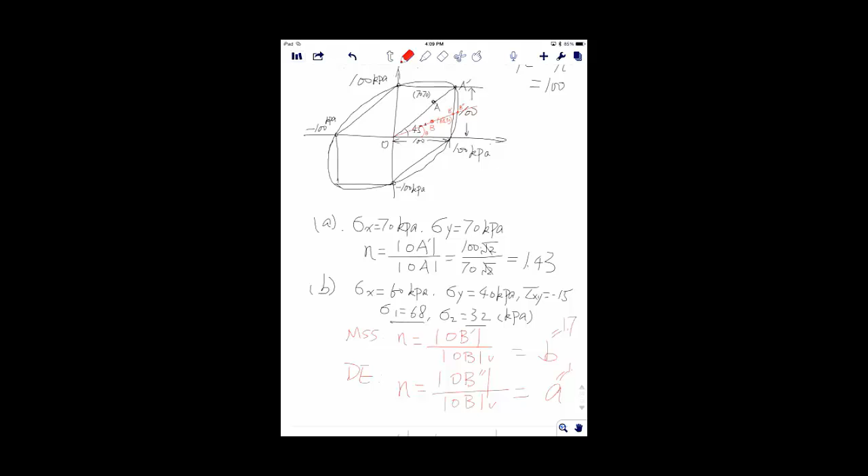Let me write it this way. Okay, so let's see whether it's true or not. 1.7, 1.7... of course 1.7 is bigger, right? In this case, this is 1.7, 1.47. Alright, checked.

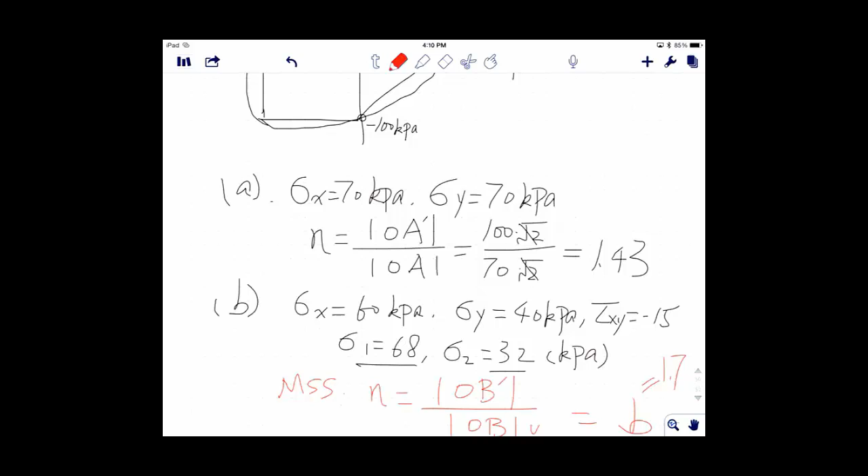So this example shows you where you have distortion energy and maximum shear stress, how you can relate them to guide your design of materials systems, or other mechanical engineering components. Because once you use these two criteria, you can calculate your design safety factor, or in other words, once I give you a design safety factor, you can compare them to see whether failure is going to happen or not. By comparing them, that can also guide our design in terms of preventing failure.

Now again, like I said, distortional energy fully relies on Von Mises stress, which is something you can find from your finite element analysis. For project 2, we are going to have two-dimensional loading, and I am going to ask you to use distortion energy to do some calculation and some finite element calculation, and we'll ask you to compare the results and have some discussion.

Yes, shouldn't they be switched? You go B and A? Shouldn't it be 1.7 B double prime? Oh, okay, he's crazy, he's crazy. So you mean this, right? Yes? Okay, sorry about that, yes.

Okay, so basically project 2 will be using all the stuff we have been learning so far and do some calculation with it. I'm going to give you the project description on Tuesday, and then we can have some discussion as well. I am going to stop here because otherwise it'll take too long to start a new topic. Okay, I'll see you guys next week.